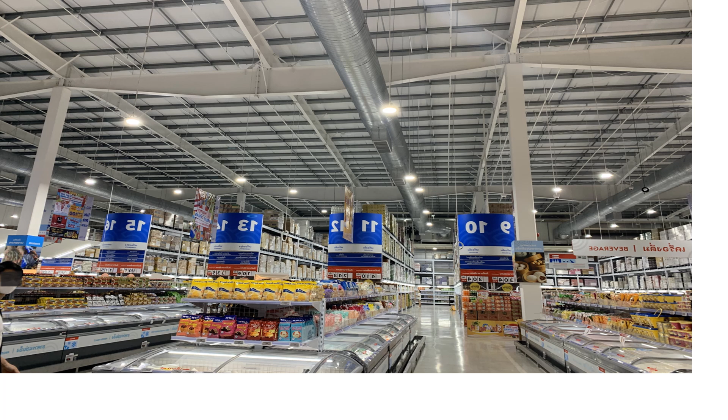Let's study the structural system of a wholesale store. This one is located somewhere in Bangkok. I took its pictures when I was there doing some grocery. The roof of the building is in structural steel. The columns are in reinforced concrete. Let's get on with it.

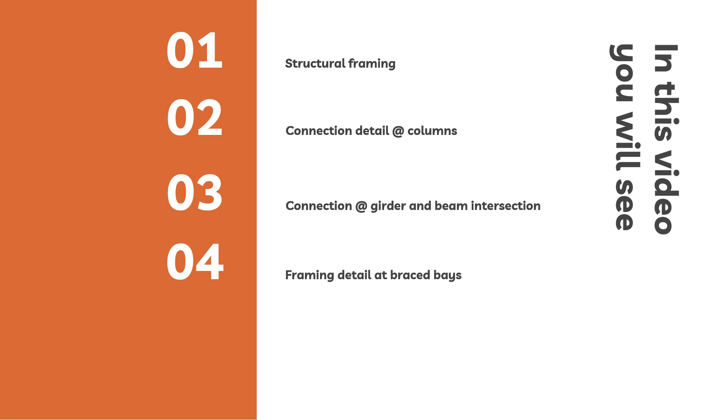I will express my observations about the structural framing of the building. I will discuss two important connection details, one over the columns and one at the intersection of beams and girders. I will also talk about the framing adopted at the braced bay. And I will talk about the structural framing of the roof in general as well.

Let's start with the load transfer first. The gravity loads are transferred via the same members which are normally used in steel roof, that is purlins, and purlins are braced against sidesway with other members as well. The purlins transfer the load to the continuous beams. Continuous beams transfer the load either to the columns or to the girders, which are simply supported, and these in turn transfer the loads to columns which take it to the foundation.

There are three braced bays in the roof in the east-west direction. I was not able to take pictures of the braced bays in the end walls. Load transfer in the north-south direction is through the frame action. You will get to know about these in the upcoming slides.

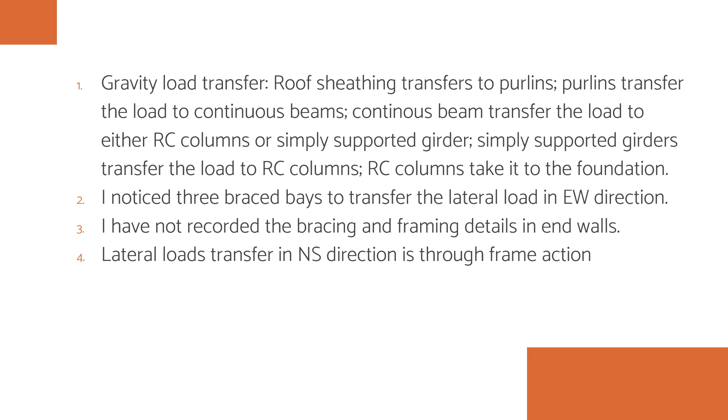This is not the complete roof framing plan. This drawing shows the conceptual framing of the roof only. You can see that there is a lateral support of purlins in the form of channel section. Purlins themselves have channel sections as well. Beam and girders have I or W section, and RC columns have a square section. In the braced bay, there is a strut as well. Strut has a circular cross section, probably a circular tube, and in the braced bay, the bracing is done with the standard rods.

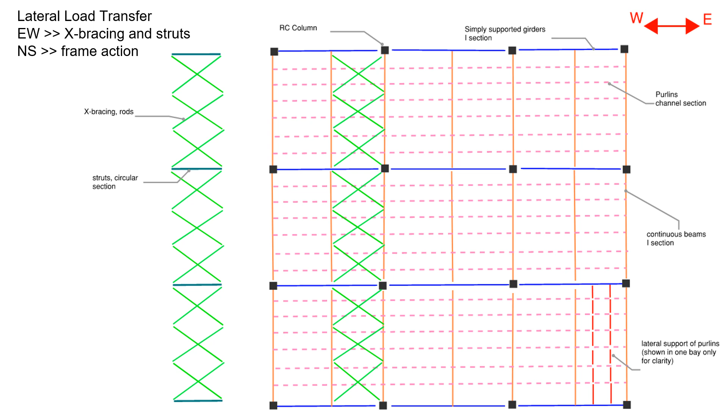In east-west direction, the load transfer is via braced bay, of course, and in the north-south direction, the building depends upon the frame action provided by the continuous beams and their connection to the RC columns. We will get into the detail in the upcoming slides.

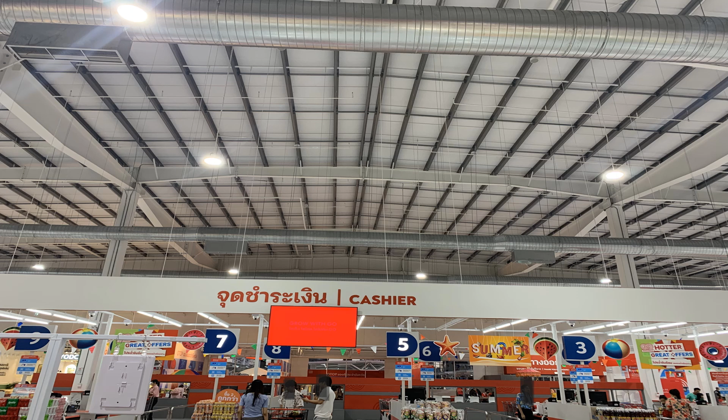This picture shows what was diagrammatically depicted in the earlier slide. You can see here that these are purlins which take the load from the roof and transfer to these continuous beams. You can see that these beams are continuous over columns, and these beams are also continuous over these girders as well. You can't see here, but you will be able to see in the next slides that these orange beams run over these blue girders as well.

You can also notice that the purlins are braced against side movements through these small channel sections, which increase their moment capacity in their principal planes. Otherwise, they can be subject to lateral torsional buckling. Now let's move on.

One other thing to note here in these continuous beams is that there are three moment connections in each bay. I don't know if you are able to see it or not, but let me draw your attention to location over here, and over here. These are the locations where these continuous beams are provided with moment connection in a single span, and there are these three moment connections in each of these spans, and the moment connection consists of extended end plates with about 8 to 10 bolts.

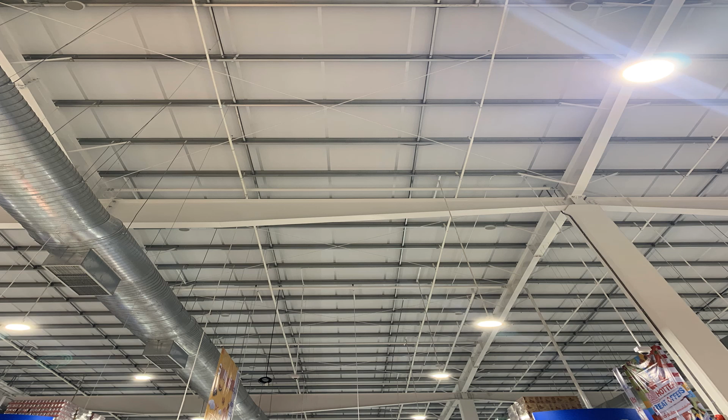Yeah, this picture shows a closer look at the braced bay. You can see that there is a strut for each cross bracing, and there are about 3 cross braces in each bay in north-south direction. So this is the north-south direction, and this is the strut that I'm talking about. There is a strut here, there is a strut here, there is a strut here,

and this is one simply supported girder, this is another simply supported girder, and you can see that there are 3 cross bracings in one bay, and this cross bracing runs from continuous beam to continuous beam. This is one continuous beam, this is another continuous beam hidden by this AC duct, and that's how the braced bay of the roof framing looks like.

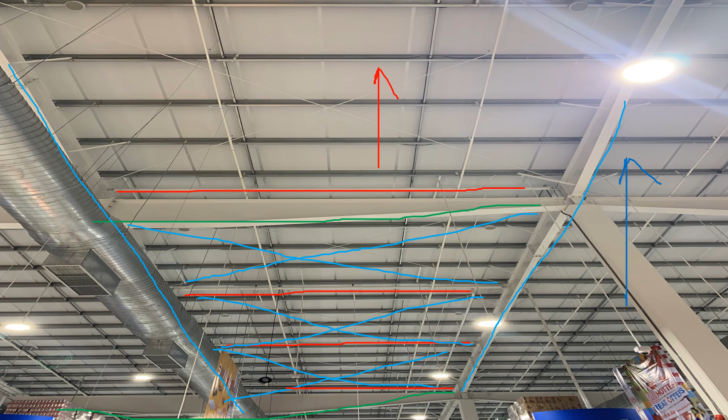There's probably a strut here as well, and similarly the bracing keeps going in this direction as well, and there are, I think, 3 braced bays in this entire roof. One is here, one is on the left end, and one is on the right end. This one is somewhere in the middle of the roof framing.

Yeah, this picture was taken to clarify the beam to girder connection over here. You can see that the girder has an end plate moment connection at about mid span. There is also a flange brace for the girder. There is a flange brace for the beam at this location as well.

And you can also notice that there are web stiffeners in the girder. There are also web stiffeners in the beam, but you can't notice it here from this picture. This is the flange brace for the girder, and this is the flange brace for the beam.

This is the web stiffener that I'm talking about. This is the web stiffener in the girder. There is a web stiffener here as well, but you can't see it, and you can see that the girder has an extended end plate moment connection at about center span, and it has about 12 bolts.

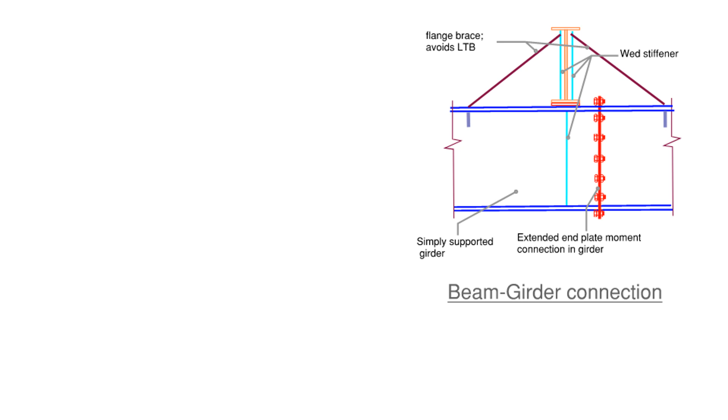Okay, this is not a picture, it's a diagram drawn by me, and the diagram shows the girder to beam connection, which I showed in the previous diagram. You can see that this stiffener over here is right there, and this end plate connection is right over here.

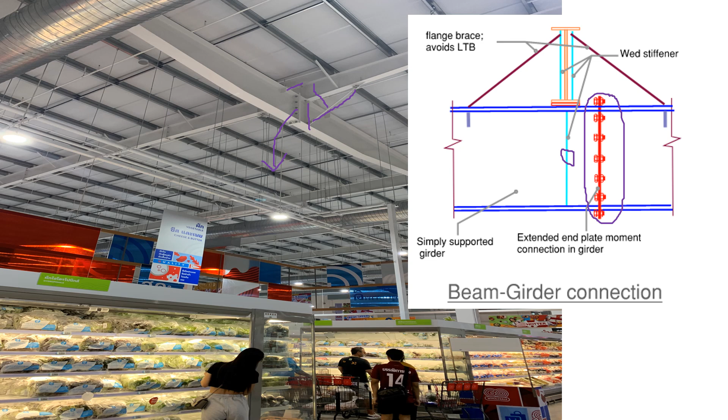That's pretty much how this connection looks. I hope this beam to girder connection diagram clarifies what is being constructed. Let's move on. Okay, I have added two further diagrams.

These diagrams show the beam to column connection. This is also a very important part of this structure because it provides a load transfer path in the north-south direction via the rigid connection at the beam and column joint assembly. You can see here that the girder and the beam have a shear connection. There are about 8 bolts for the shear connection, but for the beam it's a moment connection. There are no bolts here.

The beam simply goes continuous over the column as shown here, and two web stiffeners are provided in the beam to transfer the point load. You can see that they have also used an I or W shaped stub between the bottom flange of the beam and top of the RC column. The stub has an extended end plate moment connection with the beam. The girder, as I've discussed earlier, has a shear connection at this location with 8 bolts.

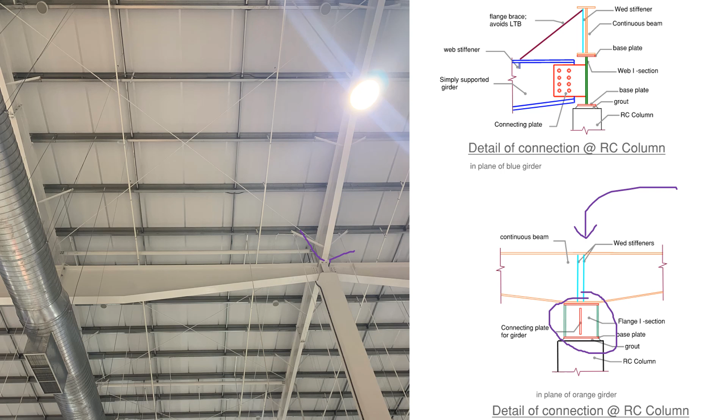This slide over here shows all the connection details that I discussed earlier. I hope it clarifies what is being constructed at the site. You can see the detail of the RC column and the continuous beam connection, as well as the girder to beam connection here. You can refer back to the earlier pictures and relate to what is being drawn here for better understanding.

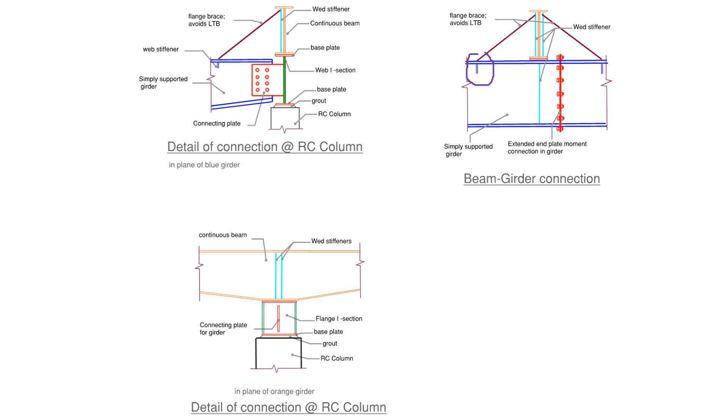One thing that I missed earlier is that there is a web stiffener at the location where the flange brace of the beam connects with the girder. That's a nice detail. It basically transfers this small point load into the web without having to fear about the buckling of the web of the simply supported girder.

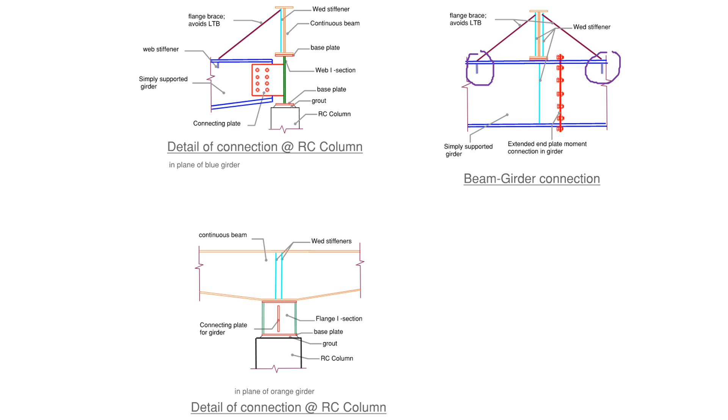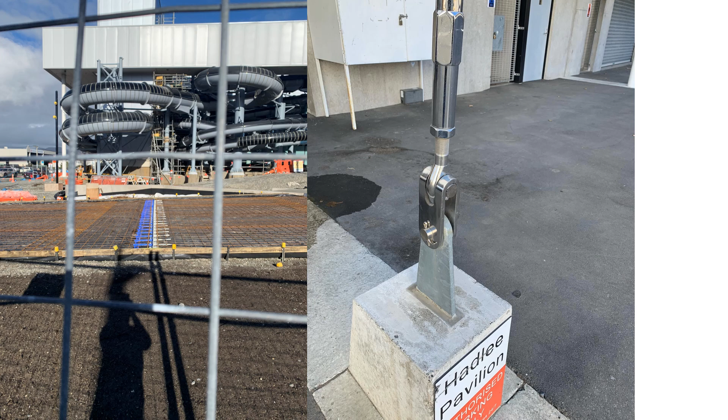These are details not related to this particular building. If anybody is interested, the one on the left shows an expansion joint for RC pavement. The one on the right is a classic pin connection to anchor an uplifting force. The joint of the RC pavement, which allows expansion, can also transfer the V load across the joint. That's why it has been detailed like that.

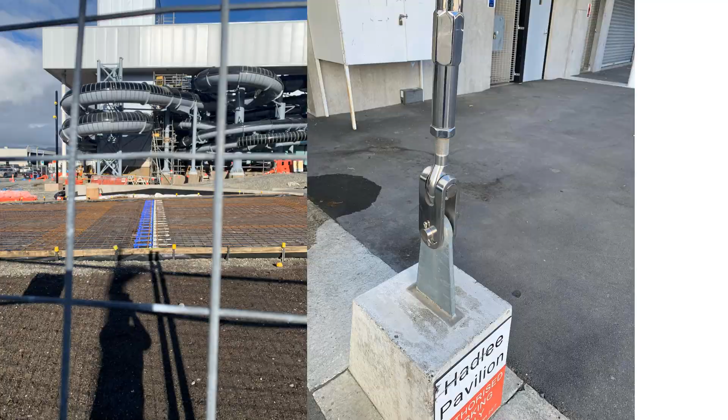Thanks for watching. I hope you understood the structural framing adopted for this building, as well as the important connection details adopted for this building to transfer the forces.